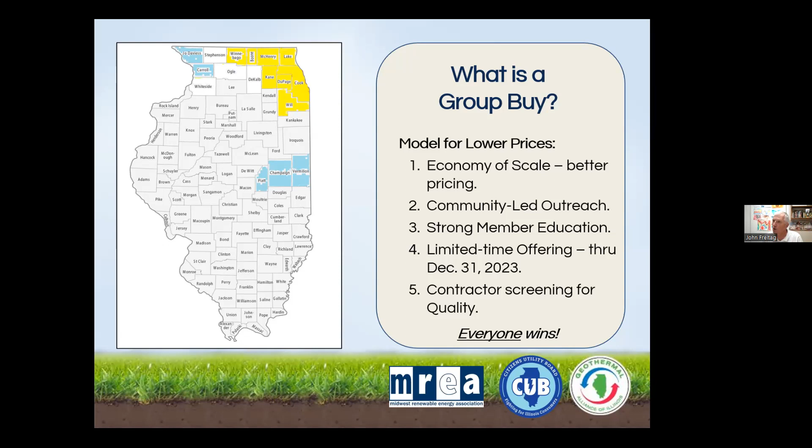Those are the first three geothermal group buy programs that I know of, and the only ones that I know of on planet Earth. Hopefully this is a model that'll take off, but it got started in Illinois. So here's some details about the program.

We kicked off, give or take, about April 1st, early April. So this is a real new program. We've done about a half a dozen of these power hour sessions, both in person and virtually. The program runs to the end of the year. My hunch is that we're going to have pretty good success with it. Then there will be a year 2 for the program, but that's details for down the road.

So why do we want to think about geothermal heating and cooling, and why do we want to promote the technology? Well, it's the most efficient technology known to mankind today. Don't take my word for that—that comes from the US EPA. You'll see as we go through this presentation that it's not only the most efficient heating and cooling technology available today by far, it's also the most environmentally friendly and most comfortable heating and cooling technology you can have for your home or business.

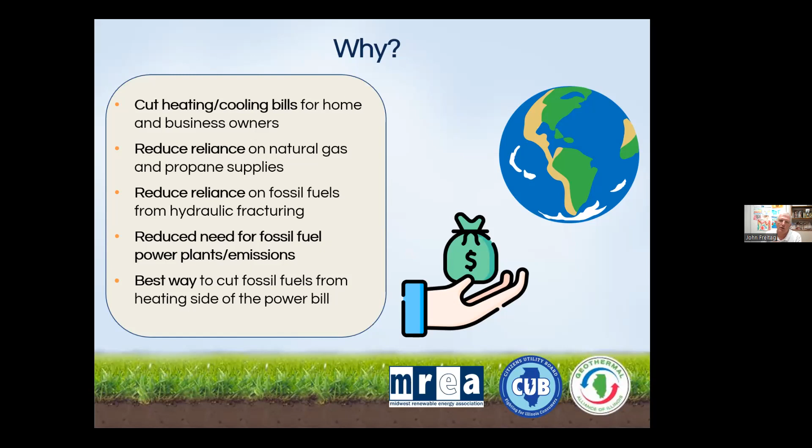Like we said at the beginning, I've had it in my own home for 24 years now, and my wife will tell you that it is the most comfortable heating and cooling technology she's ever been around.

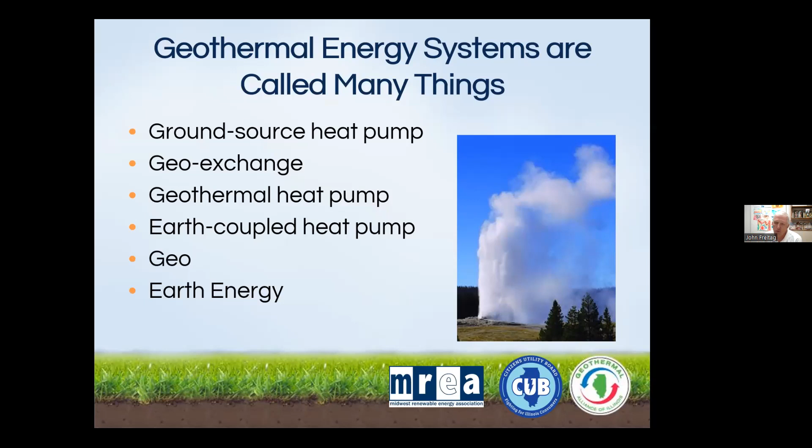We know if you go around the country, geothermal's called many different things. Out east in the New England area, they tend to use the term ground source heat pump. That's fine, it's all the same stuff. We just refer to it as geothermal in Illinois because that's what people know it by. And no, it's not Old Faithful—you don't need Old Faithful. It's not high temperature geothermal, it's moderate temperature geothermal, typically accessing the Earth's free energy through a system of piping in the ground.

Geothermal heat pump technology produces on-site renewable energy. Don't take that from me, take that from the federal government, the US EPA and the Department of Energy—they refer to geothermal as renewable energy. Some people would say, how can geothermal, which uses electricity, be renewable energy? Well, it's renewable energy because we're using the Earth's free energy; we're just using electricity to move that energy. If you remember anything from tonight's presentation, just remember that geothermal, while somewhat complicated compared to conventional stuff, really does simply two things: pumps water and blows air to take advantage of the Earth's free energy.

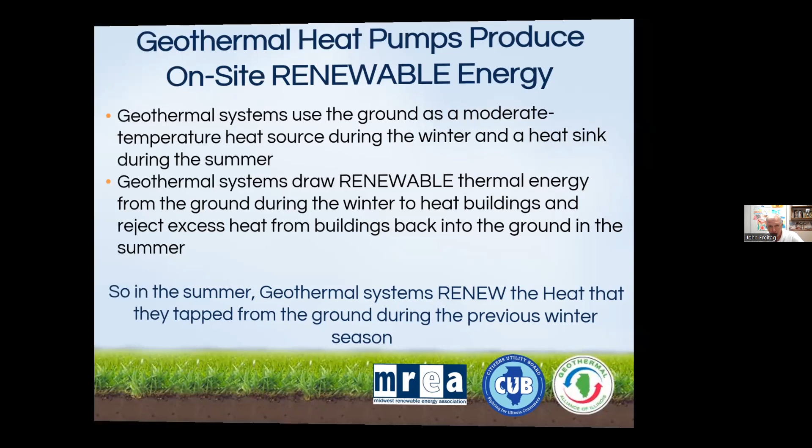So how do we do that? Well, I'm looking out the window right now and it's pretty dark outside, so we must be having some lightning going on. You've probably heard we've had a lot of electric utility issues in Springfield the past week—we still have about 5% of folks down here that are out of power. We had a big windstorm last Thursday, and they're still recovering from that.

But we know that the Earth's a vast solar collector. I can tell you that probably most of the day my solar array was chugging along at 100% for probably 5 hours today, and even at this time of night it's producing something. Even on the darkest, dreariest days of November and December, those gray, short days, my solar array still makes some energy—not as much as on a day like today, but it makes some. The Earth is a vast solar collector, and every day of the year, 365 days a year, it's collecting that solar energy, and we're taking advantage of that with geothermal heat pumps.

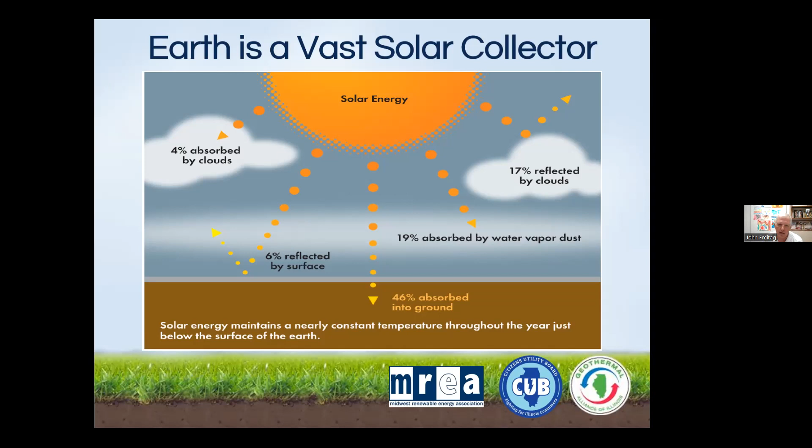This is an important slide because it shows why we are absolutely in the sweet spot for geothermal.

My incoming water temperatures with my geothermal system are right in the 53 to 54 degree range on a pretty much year-round basis. Why is that important, or significant, and why is it a good thing? Why are we in the sweet spot?

We know that in central Illinois, and you folks in northern Illinois are probably in the low 50s, 50 degree range for your earth temperatures. And why is that a good thing?

It's good for taking advantage of geothermal because we're heating and cooling in our part of the country. We're probably 60-65% heating, 35-40% cooling, give or take, and we go back and forth. In the summer we toggle into cooling, which is important on a day like today, pretty warm here in central Illinois. Then we can take advantage of the earth for heating in the winter. So we've got this nice source of a constant heat sink in the low to mid 50 temperature range that we can take advantage of in our part of the country.

Consider if you were in southern Texas or southern Florida, the earth is a lot warmer there, maybe as close as 15 to 20 degrees warmer. What are we trying to do in that part of the country? We're trying to reject heat into the ground, and the earth is already way warmer. So that's a much less efficient exchange of energy. It's tougher to reject heat into the ground when the ground is already much warmer.

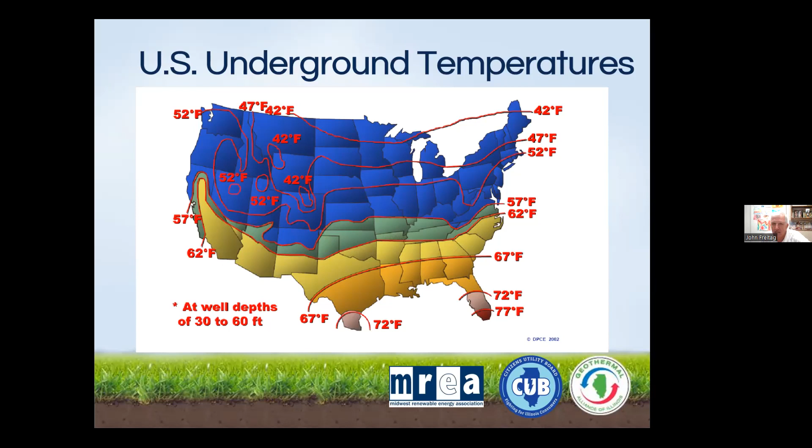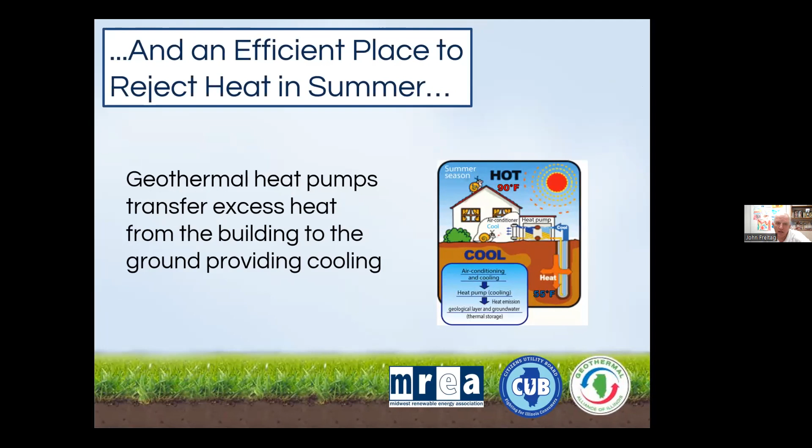We're in the absolute sweet spot in the middle of the country of the US for taking advantage of geothermal technology. So we know that the earth is a source of heating in the winter, and it's a place that we can reject heat in the summer. That's what cooling really is, it's a rejection of heat. We do this with geothermal technology, typically through a series of sealed underground pipes that look just like this. This is an exact piece of piping with fluids circulating through it, naturally warmed or cooled by the earth depending on whether we're in heating season or cooling season.

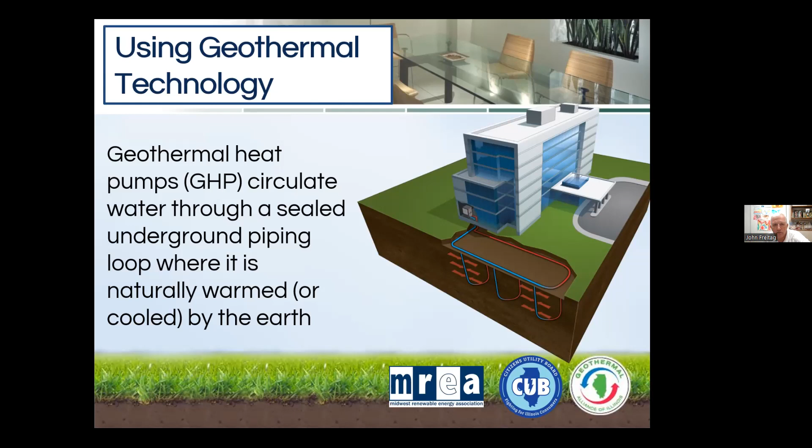Here's an important slide. My friend Dave Buss, who's monitoring the chat tonight, likes to say: if I asked you to give me $1 and then told you I'd give you $5 back in return, would you do that? Of course everybody would. That's really what geothermal does. For every $1 of energy you buy from the electric utility, for most of us ComEd, you get $5, maybe $6 worth of energy back. Why do you get that? Because we're using the earth's free energy, we're just paying for a little bit of electricity to move it.

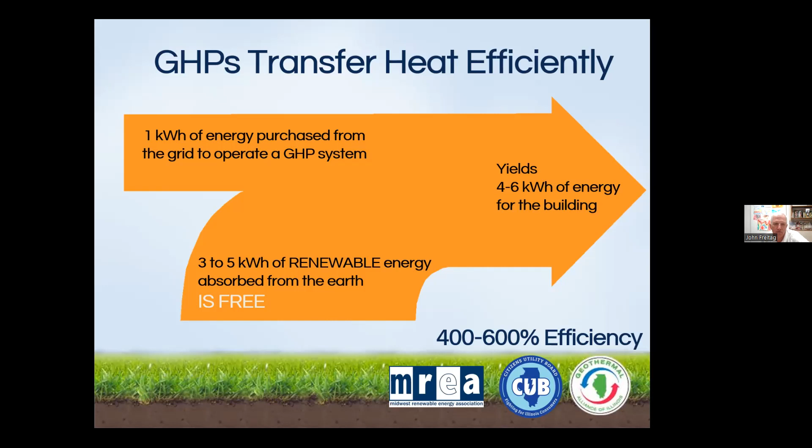Now, a lot of people, probably some even in this meeting tonight, think this is really new technology. But Dave put his first system in the early 80s. I've had geothermal in my own home since 1999. I went to work for the electric co-ops in a building that was heated and cooled with geothermal in 1985. So the technology's been around a long time.

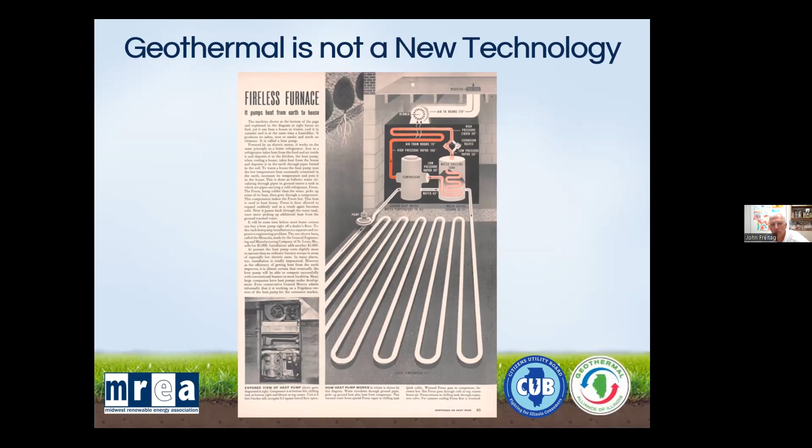Some of you would even remember Life magazine. This issue from the fall of 1948 had an article on the fireless furnace. For all intents and purposes, this was the first geothermal, these were the first geothermal systems. Kind of crude compared to today, very crude. They made a lot of mistakes and learned what worked and didn't work. But over the years, the technology has gotten much more efficient to the point where we're at today with 400 to 600% efficiency for the top of the line geothermal systems. Just incredible technology and incredible efficiency.

So everybody's heard of a heat pump. Probably not all of you have heard of geothermal heat pumps, but you've all heard of heat pumps. And if you've heard of heat pumps, you've probably heard of an air source heat pump.

So what's an air source heat pump and how does it compare to a geothermal heat pump? Well, both of them basically move energy from one location to the other, much like a refrigerator. If you pull your refrigerator out and put your hand at the bottom of the back of it while it's running, what do you feel? You feel heat. The refrigerator is rejecting heat into your conditioned space. Geothermal and air source heat pumps work much the same way.

An air source heat pump sits on a pad outside and it heats in the winter, trying to take heat out of the outside air. Even if it's 5 degrees, it's working hard, but it can still get some heat out of that air, believe it or not—it just has to work incredibly hard to do it. Geothermal is much more efficient, doing the same thing, but it takes heat out of the ground. Remember, there's no season underground; it's always the same year-round, probably 50 to 52 degrees in Northern Illinois. So geothermal is a much more efficient exchange, and that's why it's by far the most efficient heating and cooling technology available today.

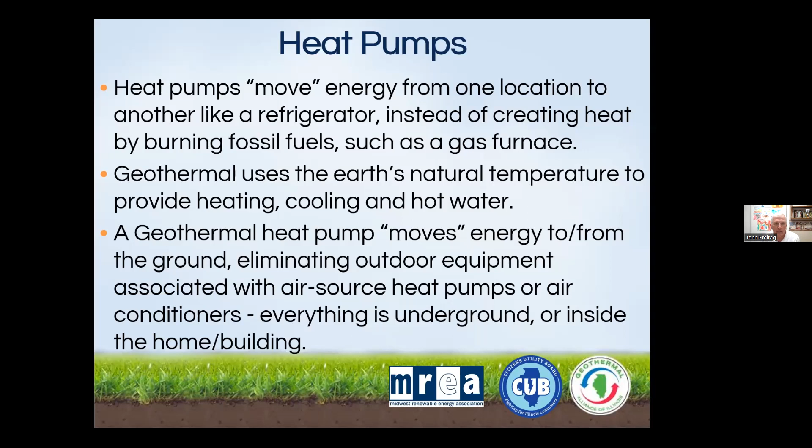So the next two slides describe the 4 circuits of every geothermal system. They're all important, and it's important to know that they all have to work and collaborate together, but they're all completely separate from one another.

There are 4 circuits. The first is the distribution circuit—in most of our homes, this is ductwork, which circulates cool air in the summer and warm air in the winter to heat and cool your home. In some homes, this might be piping for a radiant heat system, but for most of us, it's ductwork.

The second circuit is the refrigeration circuit, inside the actual geothermal unit that sits in your utility space, crawl space, or basement—wherever you have your heating and cooling system. You'll see pictures of my geothermal system in a few moments; it looks much like a furnace, only it has some piping connected to it.

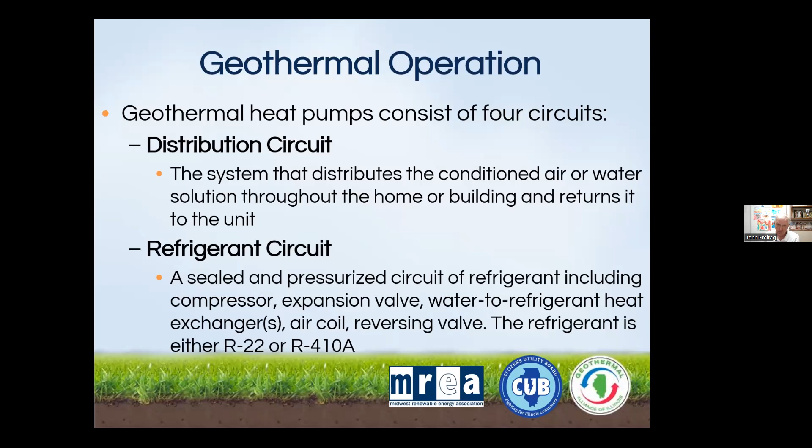The third is the ground loop circuit—basically piping buried in the ground. I'll tell you about mine in a moment. My loop field is 175 feet deep, in my front yard right behind where I'm sitting, with probably the first loop about 15 feet from where I sit.

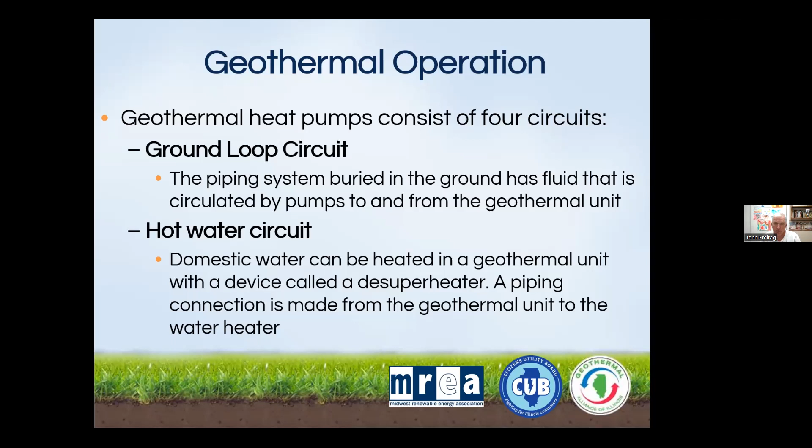The fourth circuit is the hot water circuit. It's not on every geo system, but it's on most residential systems. Why is it important? Because it provides free or subsidized hot water. And why is that important? Heating domestic hot water in most homes is the second largest user of energy, right behind heating and cooling, and in some homes it can be as much as 20% of energy usage. It's a free byproduct of every geothermal system, or can be, so it's important to have the hot water circuit installed.

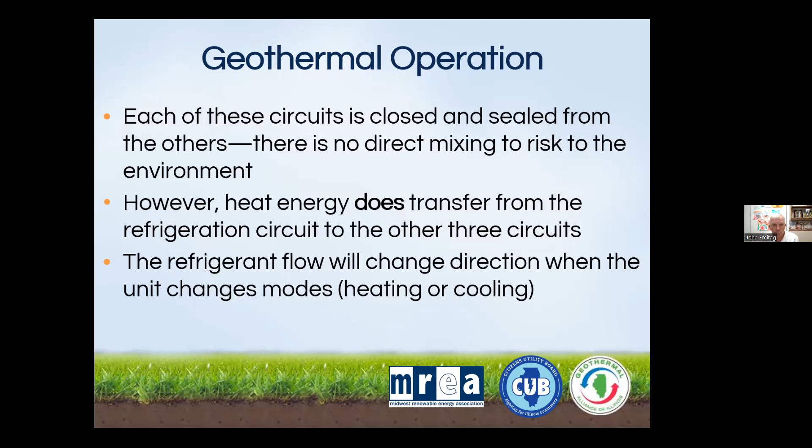Each of these circuits is closed and sealed from the others, but it's important that they all work together so energy transfers from one circuit to the other, while the fluids don't intermingle. The fluids in my loop field out in my front yard don't mix with the water that goes to my water heater, and neither of them mix with the refrigerant in my geo system. They're all completely separate and sealed, but it's important that they work together.

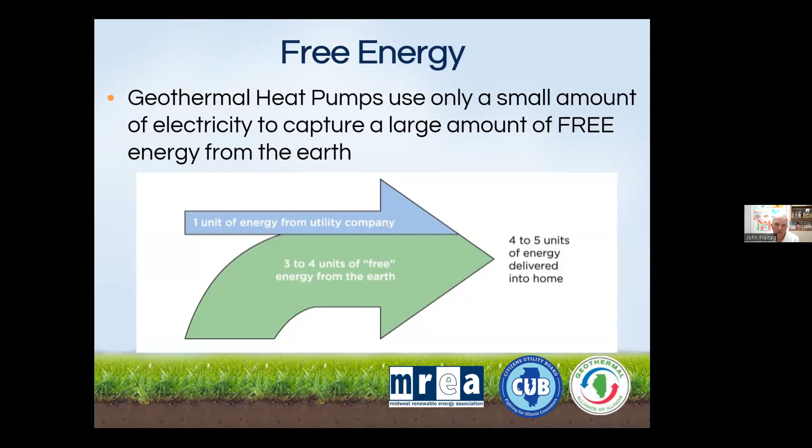This point is a little redundant, but it's important, so I like to repeat it: if you buy a kilowatt hour of energy from ComEd or whatever your electric utility is, you get the equivalent of 5 kilowatt hours of energy out of that, because most of it's free—we're just paying to move it.

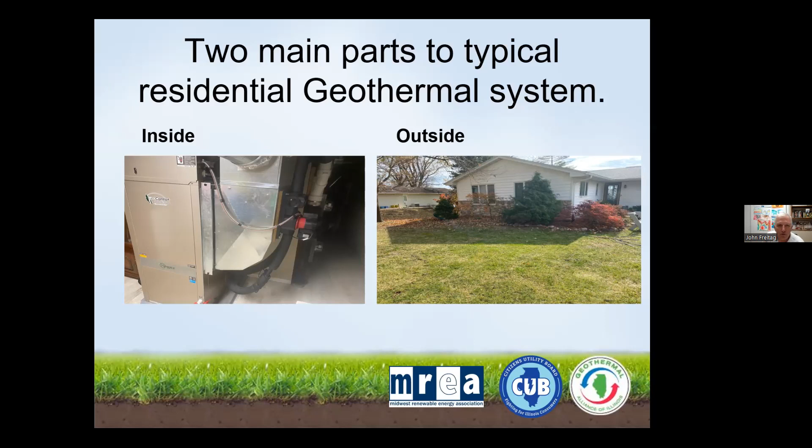So when we talk about efficiency, remember geothermal is the most efficient heating and cooling technology available today by far. We rate our equipment in two ways, one for cooling, one for heating. In cooling, we rate by energy efficiency ratio, or EER. Probably most of you haven't heard of that, but the higher the rating, the better.

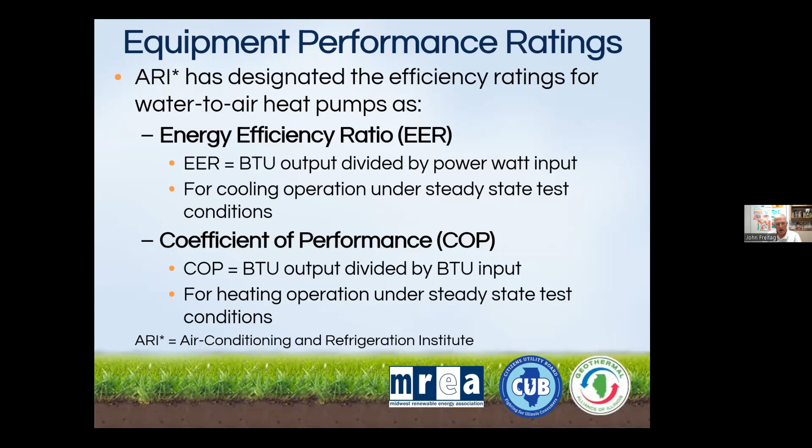You've probably heard of SEER, which stands for Seasonal Energy Efficiency Ratio. We don't use that with geothermal because geothermal knows no season. Underground, it's the same year-round, never changes. So we've got a much more efficient base on which to operate. In heating mode, we rate by coefficient of performance, or COP. Again, the higher the rating, the better, the more efficient.

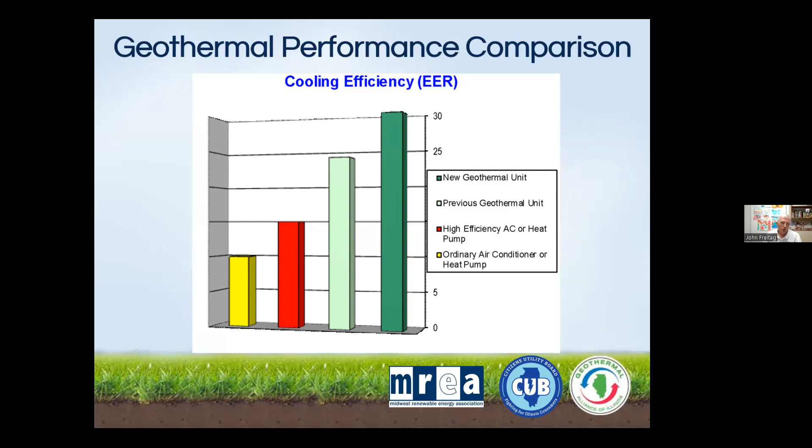So in cooling, we rate in EER, and you see the newer systems now are north of 30 EER, and that is really good. You see how it compares to an ordinary central air conditioner system, or a very basic old school air source heat pump, on the yellow bar. There's no comparison, at least 3 times the efficiency.

And in heating mode, this is where geothermal really shines, with COPs north of 5.0. You see how that compares on the other end of the spectrum to the old school 80% efficient gas furnace or gas boiler. It's absolutely no contest, you can't even really compare the two.

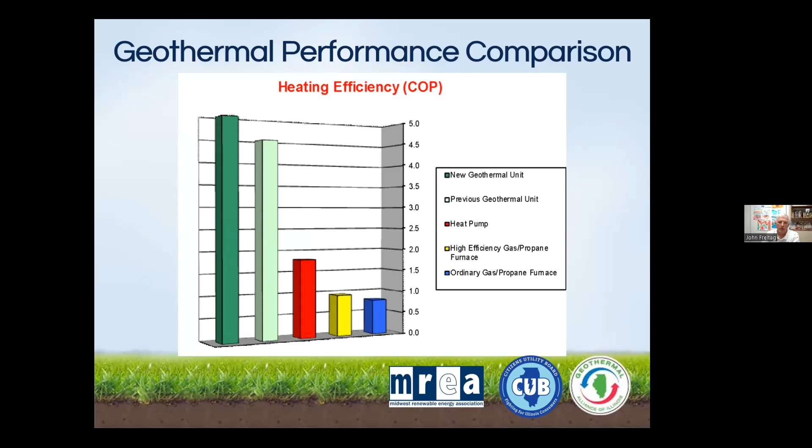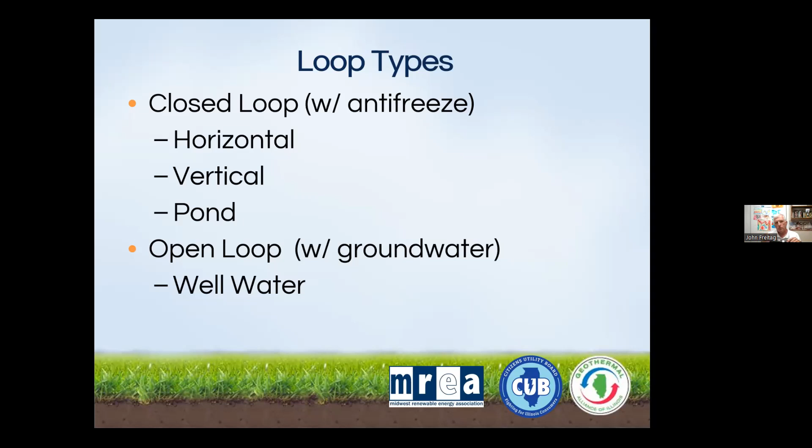So what's the heart of the geothermal system? It's the geothermal loop field. For most systems, we use a closed loop system. There are some open loop systems in Illinois, and I'll spend a little time on that, but not much, because they aren't all that common. Most have a closed loop system like mine. Remember, my loop field is three 175-footers, just like this, except the piping, instead of 18 inches from top to bottom, is 175 feet deep. That's connected to my geothermal system that's 10 feet from me, and it's a vertical geosystem.

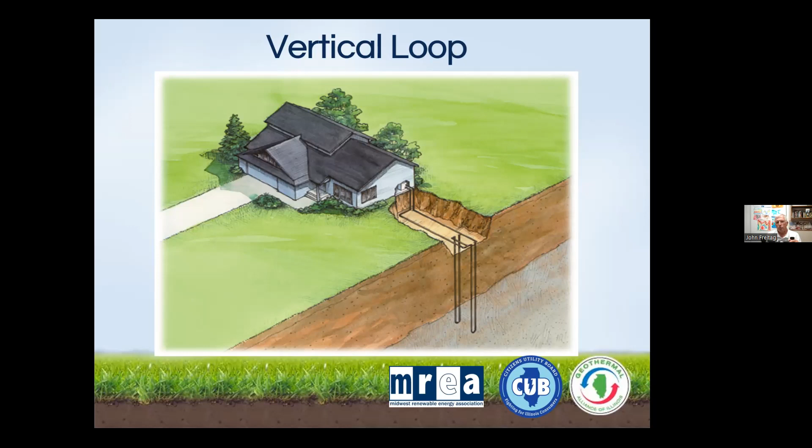I would say in Illinois, of all our geothermal systems installed in our state, probably 85+% are vertical loop field systems. Why is this? Well, for the most part, most of us don't have a big yard. Most of us have existing homes with finished yards, and it's just the easiest, best way to get a loop field into a rather compact space with the least amount of damage to our existing yards.

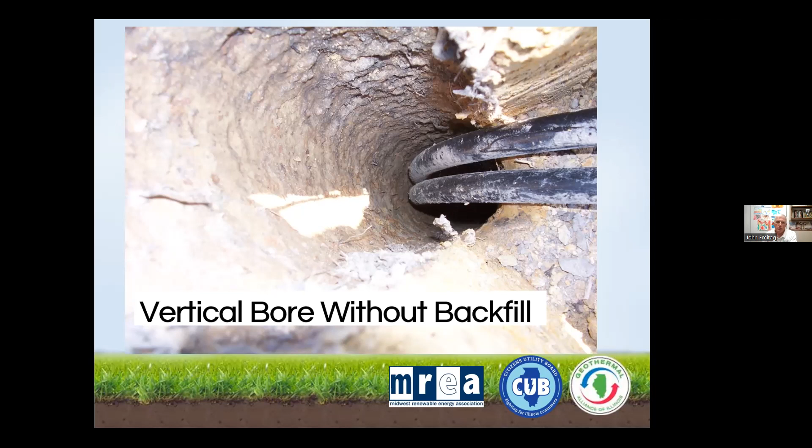So what does this look like? On installation day for the loop field, a drilling rig that looks much like a water well rig comes in, drills a 5-inch hole typically, drills to the prescribed depth, and inserts the piping into the hole. As soon as that's done, that hole is backfilled with bentonite grout.

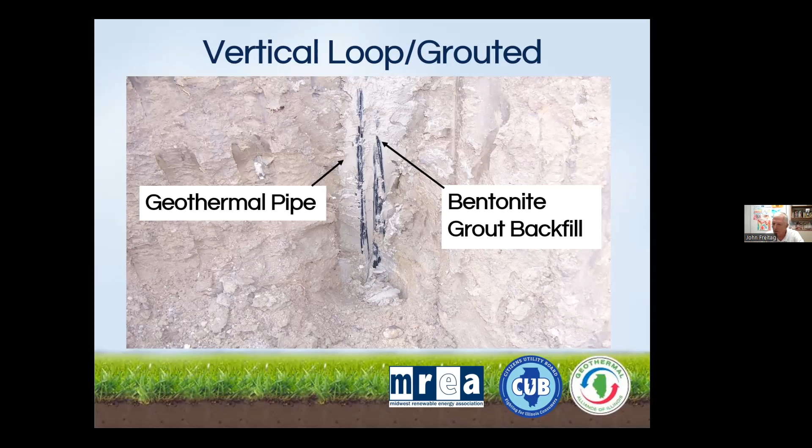Why is this important? It's important for two reasons. Number one, we want to seal that borehole because that's a potential path for contamination to our groundwater, and we don't want that. The bentonite grout seals it better than the earth did itself. Number two is the conductivity. What needs to happen underground? Well, we want to dissipate the heat in the earth, spreading it out in summertime when we're rejecting heat into the earth. In wintertime, we want to draw that heat into the fluid that circulates through this piping. Bentonite grout does that very, very well.

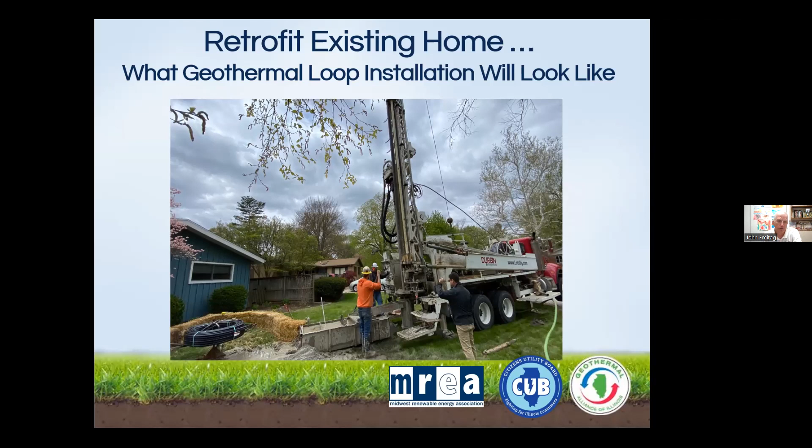It makes a little bit of a mess, but it heals up pretty quickly, and then you go on. Like I said, my system's been in for 25 years. It'll be in for another 100 years in Illinois, in Springfield, Illinois.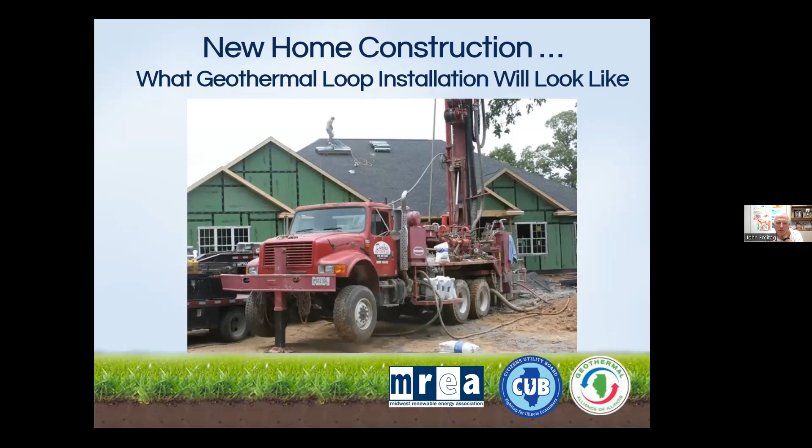This is what new construction might look like. This was a picture taken in Springfield, actually of a guy I used to work with before I retired. You see, they were building the house, still putting the roof on when they were putting the loop field in the front yard. And of course, they didn't have nothing really to tear up there because nothing was finished yet.

This is how many people it takes to put in geothermal. That's as bad as the jokes are going to get tonight. In fact, it's the only joke you're going to hear. We used to train heating cooling contractors in loop field installation, and we do these field days, and that's why these guys are all standing around with their hands in their pockets, just observing that part of the job that they usually don't do, but it's good for them to understand. So that's what that was.

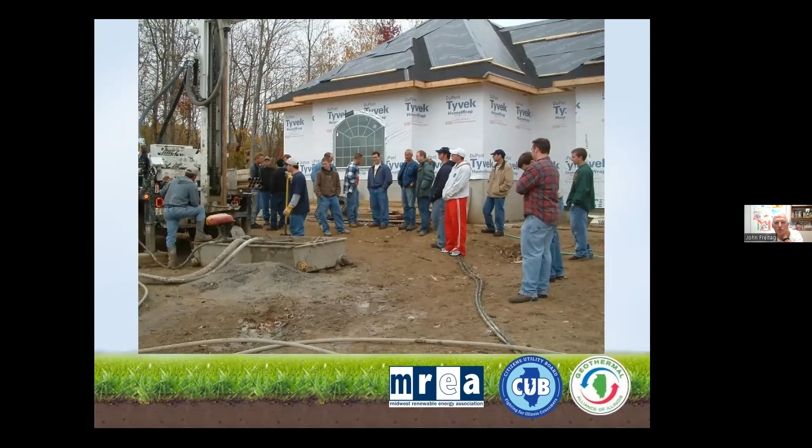Another way to put in a loop field is with horizontally bored loop field. This is increasing in popularity in some areas, and it offers some advantages and also some disadvantages compared to the typical vertical loop field installation, which is still the most popular. The nice thing about using directional boring technology is that you can put the loop field in diagonally, horizontally, go around in a circle if you have to, move around trees and such, and it does a little bit less damage to the yard.

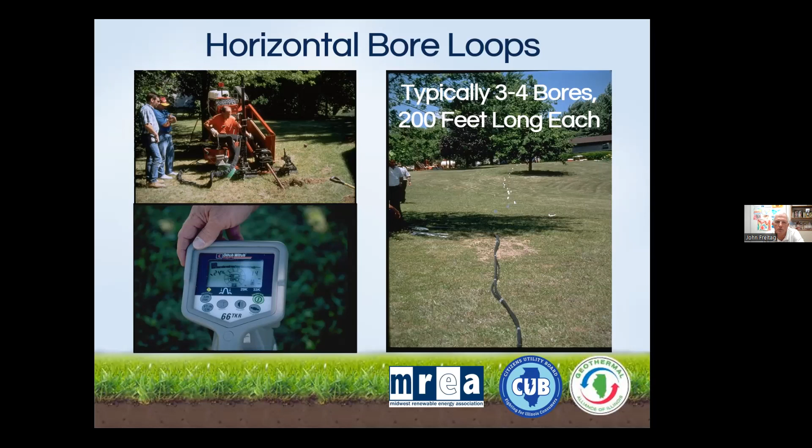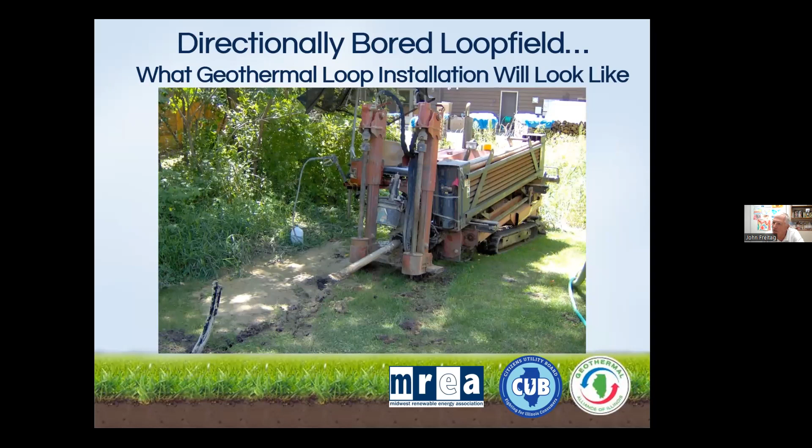Everybody has seen this type of equipment along roadsides, putting in fiber optics, water lines, and sewer lines. But you can use it for putting in geothermal loop fields too. So this is what it might look like. You can see it's probably lunchtime here. They've put in the first loop down in the lower left-hand corner, and when they come back, they're going to start on the second one. Eventually they're going to tie into the house in the background, and that's going to look something like this.

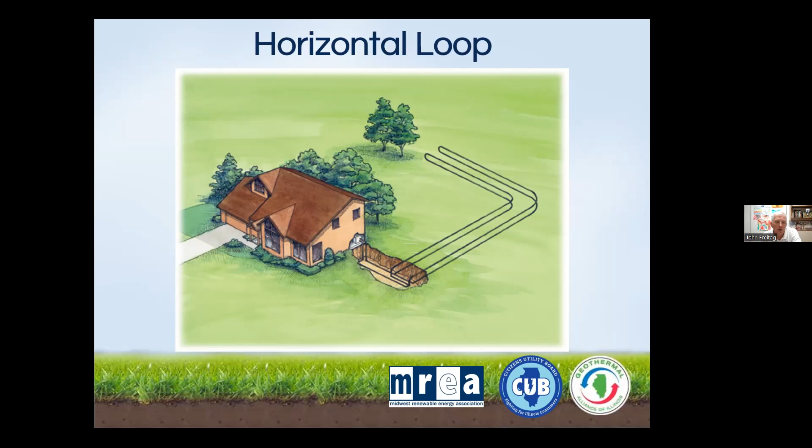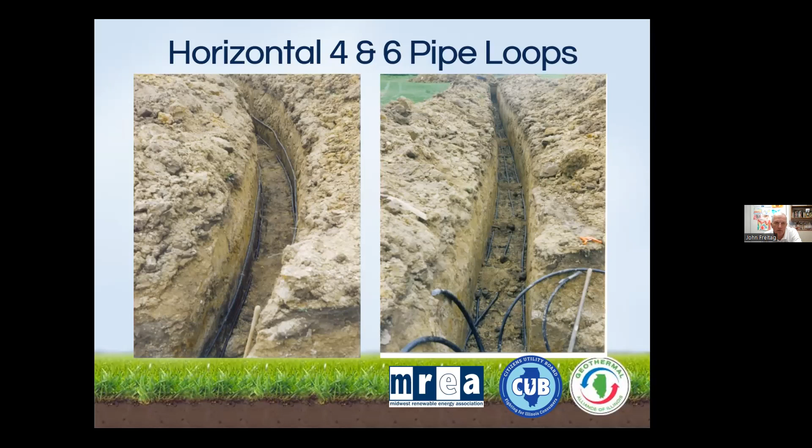Then there's the horizontal loop field, pretty much the same idea as the vertical loop field, remember mine in my front yard, except these loops are installed horizontally like this, typically at a depth of 6 to 7 feet. So why would somebody do this? Well, if you live out in a rural area and you've got maybe a 5-acre lot and you're building a new home, nothing's finished yet, this is a perfect way to install the loop field, save a little bit of money because it costs a little less, and you don't really care if you have to come in and trench or use a track hoe to dig your loop pit for the piping, because nothing's finished yet. So it provides another alternative.

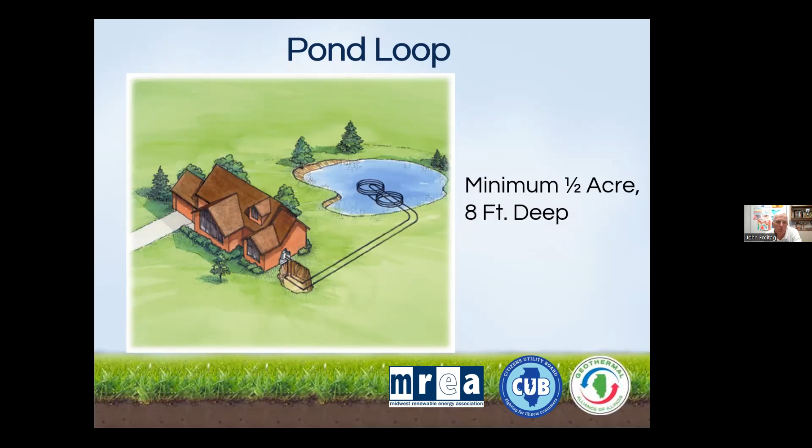Another alternative yet for those people who might be fortunate enough to have a big enough piece of property is a pond loop. If the pond is big enough, has the carrying capacity even through the worst drought, to carry a pond loop geothermal loop field, that technology can work very nicely as well. The loop is basically floated out, dropped into the bottom of the pond, and it works perfectly well.

Some of you have probably heard somebody say over time, oh, geothermal is for people who build new homes, or it doesn't really work in older homes, or geothermal doesn't work in churches or schools, or this or that or the other. Well, that is usually said by engineers who don't really design geothermal, or heating cooling contractors who don't do geothermal. I can tell you, I've been around it a long time, and Dave Buss would tell you the same thing, that you can make geothermal work in virtually any application, but it's like everything else—some are easier and more obvious applications than others. Sometimes it is just so difficult, and difficulties often make for more expensive installations. Sometimes it just doesn't make the most sense and maybe isn't even the best option, but it can work in virtually any application, and it is a great option for most people.

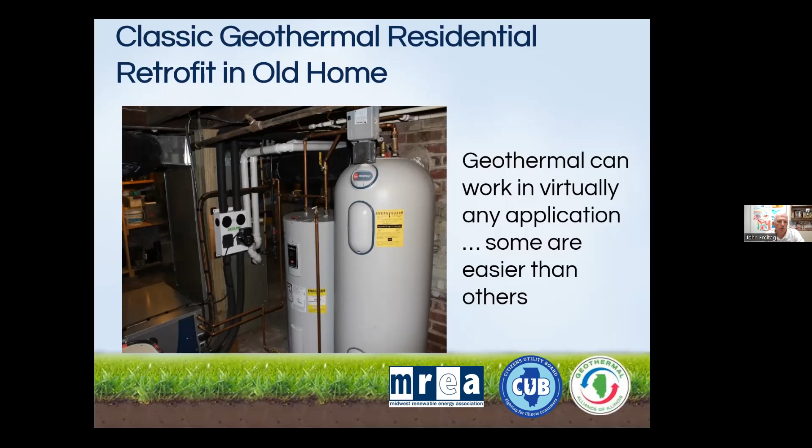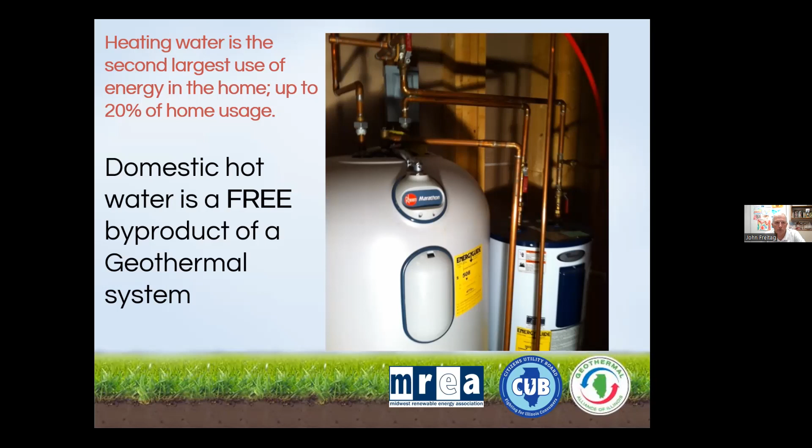Why is that? Remember, cooling is nothing but rejecting heat. So instead of rejecting it to the ground, we're rejecting it to the buffer tank to make free hot water. Geo also makes some hot water in the winter months. It's important because, especially in a home with high water usage - maybe a big family, lots of kids, lots of laundry, lots of dishes to wash - it's a big energy user. It's a great way to take advantage of absolutely free energy.

There are a few things we have to do differently with geothermal compared to conventional heating and cooling equipment. The very first step with every geothermal installation is to start with a load calculation. What is a load calculation? It's really nothing but going through the home or the facility we want to condition - could be a business, an office building, any type of facility, but for most of us, it's a home - and determining the exact heating and cooling needs. You do that by running a load calculation. It's not guesswork, we want to be exact.

Why is this important compared to conventional? Well, just about every home I've ever been in with a gas furnace has an oversized gas furnace. It's just the way it is. Doesn't cost that much more to put in that way, and it's the safe way to do it. Geothermal doesn't work that way. It can't be oversized or undersized, because with either one it just will not work properly. We want it to be right sized. Plus, this is expensive technology to put in, so we want to put in the absolute right system. So this is the first step, running a load calculation.

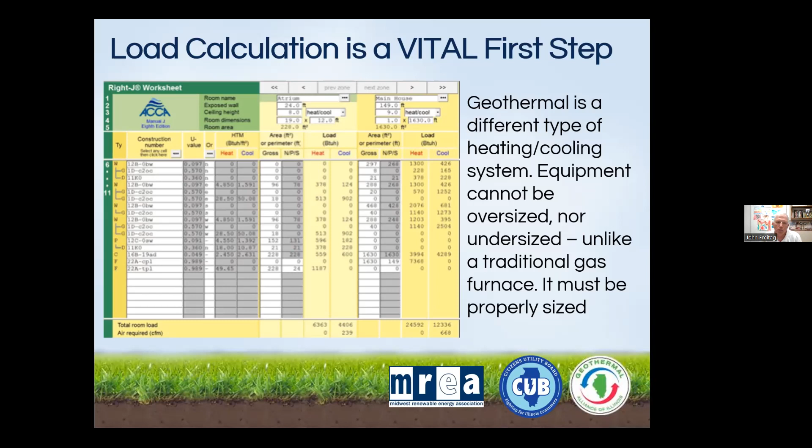Then we take the information from that load calculation and we design the system. How do we do that? We design it using the energy analysis, and every manufacturer has its own software for designing the system. It gives you all kinds of great information on what the system is going to do, how it's going to operate, what the temperatures are going to be. It tells you what the savings and energy usage are going to be, how it's going to compare to conventional over the course of a year. These energy analysis printouts are extremely accurate. So every good geo project should have these two things up front: a load calculation, and then an energy analysis that follows right behind it.

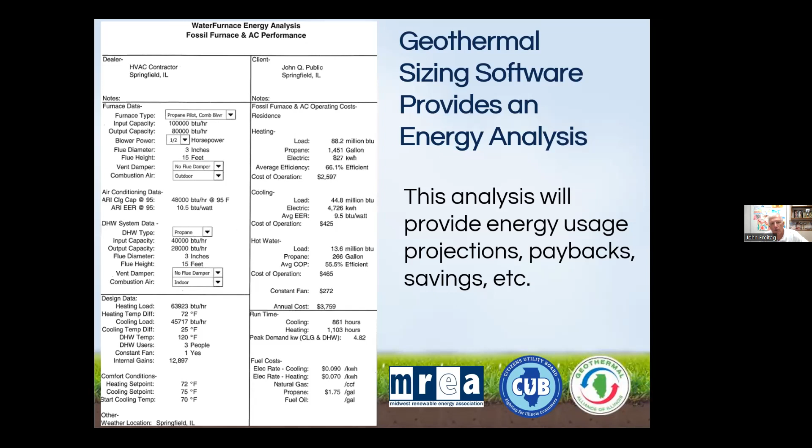So we want to share a little bit about geothermal costs and incentives, because as you've probably heard, this is expensive technology to put in your home or business, and it just is. It's expensive to put in, but it saves lots of energy over time, and it saves our earth over time. That's why we've started this group buy. One of the centerpieces of the group buy is that, depending on whether we meet our program goals, there will be a volume discount or rebate that comes back to all program participants.

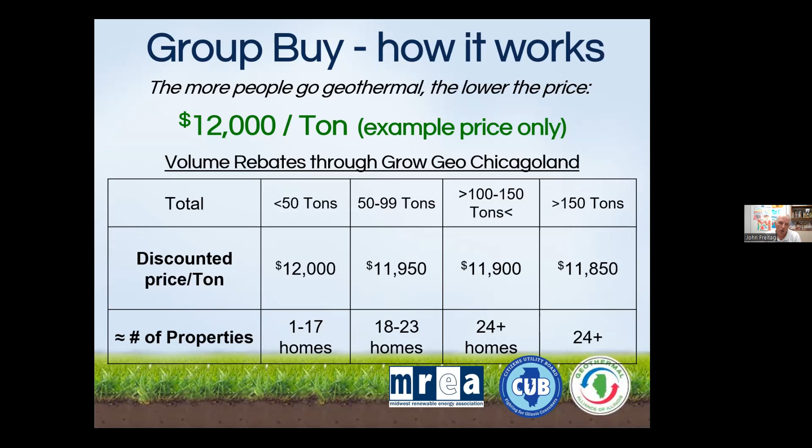So let's say you install a system this fall. Come next January, you will get a rebate from your installing contractor in the program. What will that rebate look like? My hunch is it'll be about $150 a ton. For most typical average houses, that would be a $600 rebate coming back to you, probably a month or so after Christmas. That's our goal - that's the beauty of the program. Now, it's important to say that every home is different, so we can't say geothermal will cost this much. Our goal tonight is to give you an idea about that, but really every home is completely different.

All the needs are different. Some homes won't need a new water heater, some will. Some will need a new electrical panel, some won't. It's literally all over the place. So it's really hard to say how much it costs because every project is different.

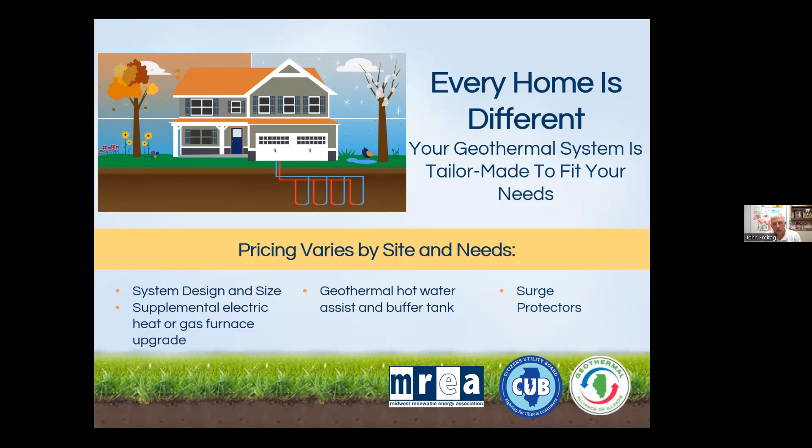But fortunately, we've got some really good incentives that exist. At the end of the day, with the incentives available to us, just know that between 40 and 50% of the total installation costs can be met by ComEd and tax credits available from Illinois and the federal government.

So the best incentive we currently have is the federal renewable energy tax credit, or 30% tax credit. This is available for the next 10 years. It's the same exact tax credit that's available for putting in a solar array, and everybody is eligible for it. Of course, you have to have an appetite—you have to pay some taxes—but it can be spread out over a number of years. And it's a tax credit, not a tax deduction.

In addition, there's a $2,000 home efficiency tax credit that's available. You can find information on all these incentives at irs.gov or energystar.gov.

In addition, ComEd has some really, really good incentives. ComEd currently has a $1,500 per ton incentive for residential geothermal. So a typical home, my house for instance, is 2,950 square feet with a 4-ton geothermal system—that's your typical type house. With that system, you would qualify for a $6,000 rebate from ComEd if you use a ComEd approved contractor in the program. All of the contractors in this program are also in ComEd's program, and there are others in ComEd's program as well. But that's a really great incentive.

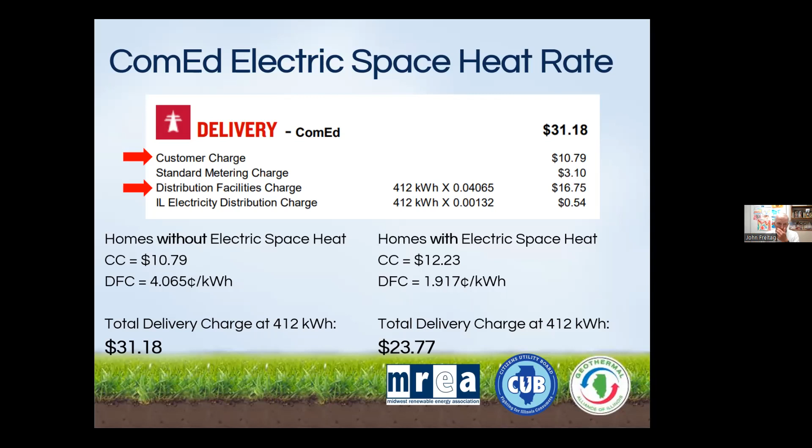Then there are other incentives you wouldn't even think about. On ComEd's delivery charge—this is on your entire delivery fee for ComEd, the wires charge if you would—if you go to an all-electric home with geothermal, you reduce the delivery charge on a monthly basis. This is forever, by about 25 to 30%. It's a small amount of money every month, but it's just an example of how geothermal can pay for itself over time with the incentives available.

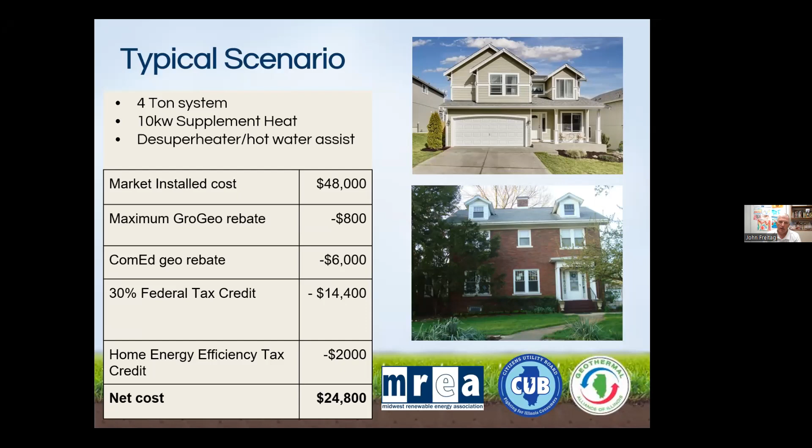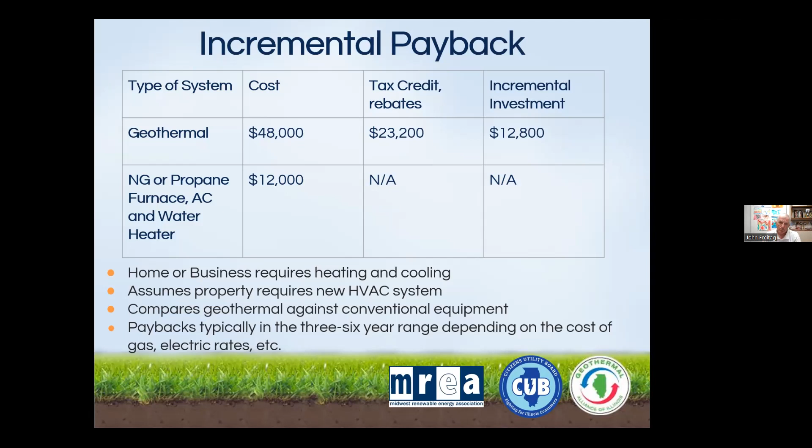So at the end of the day, how might that compare to a conventional system? Let's say you were putting in an absolute cookie-cutter gas furnace and code-based central air conditioner system—just guesswork—let's say that costs $12,000 to $14,000 to put in. Let's be conservative and say $12,000, which gives you an additional incremental investment after the tax credits and such of about $12,000. So if you're thinking about dollars only as the incentive for doing this, how do you pay that back? You pay it back over time by reducing your energy costs.

Remember, you're going to pay a higher electric bill because you're now heating with electricity. But for most of us, the end game has been to eliminate your gas bill. I eliminated mine—I still remember my last natural gas bill from December 1999, $338, which was a lot of money 24 years ago. But the efficiency of geothermal for all aspects—heating, cooling, making hot water, operating the fan—total costs are half or less. It's just the efficiency of geothermal. Remember, we're pumping water and blowing air; all we're doing is moving energy with this technology.

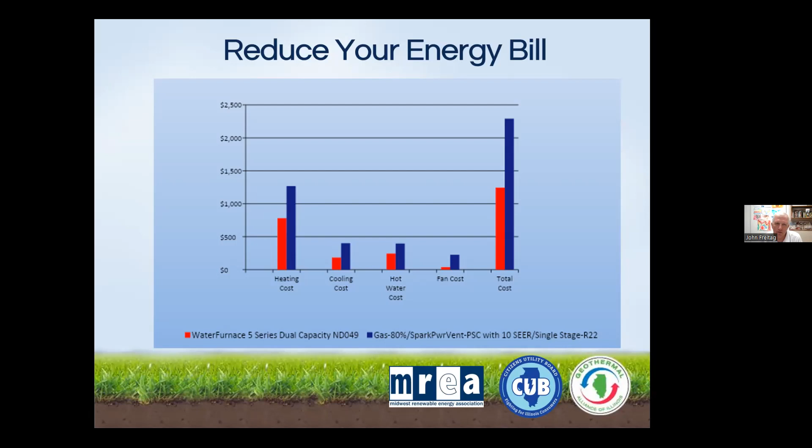So we're coming down the home stretch here. What does geothermal do to the value of your home? Well, I think it makes homes more valuable. I know it does in Springfield. I've had my own home appraised, and I know I qualify for every energy efficiency point on the checklist that an appraiser does. Would it actually make my house more valuable if I went to sell it?

Well, I think so, having solar and geothermal in my home for the person who wanted that. Is that going to become even more important in the future? I think so, because we're only going to become more cognizant of energy issues and energy costs as time goes on. I think that's common sense, and it should make our property more saleable, more valuable.

We've got another nice incentive with this program, and that's the financing option through the Clean Energy Credit Union. Some contractors also offer this, but it's available through this program. Anybody who installs geothermal through this program gets a free membership to MREA, which allows you to finance through the Clean Energy Credit Union. You'll find information online there as well.

As we get to the end here, we want to talk a little bit about health and environmental benefits. It was mentioned earlier that a couple of days ago, the Earth had its warmest day ever on record, we think. My wife, Joan, commented to me the other day as we were looking at the haze from the forest fires in Canada. She said, boy, we sure have made a mess of our Earth, haven't we? We just have to do something about the mess we've gotten ourselves into.

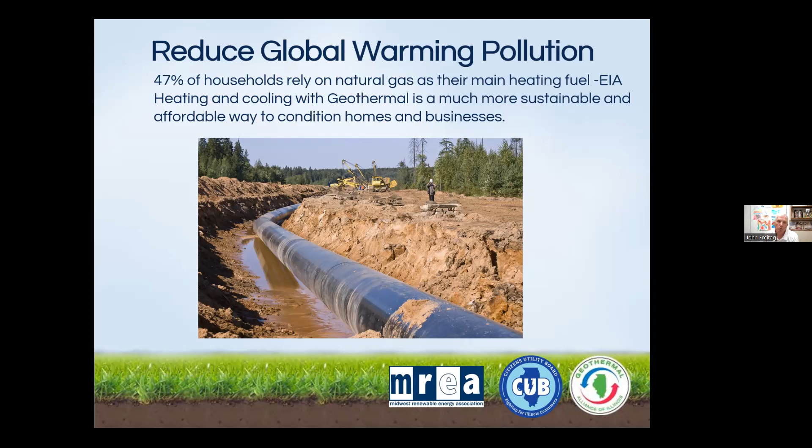Really the answer is geothermal. It's the most efficient way to go, along with solar. Combine the two together, and it's just a match made in heaven. It is absolutely the answer. Isn't it an expensive answer? Yes, it is. But if we want to do anything about climate change, this is the way to do it.

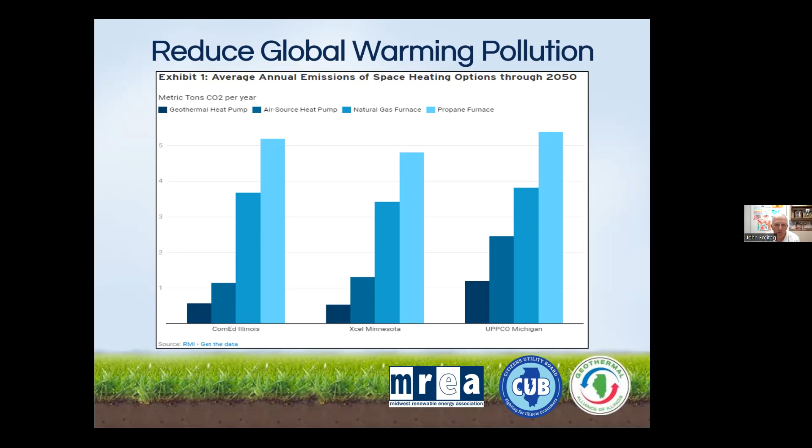This is an important slide. You'll see ComEd on the left side, showing the amount of global warming pollution in the ComEd system if we use geothermal — you'll see that in the lowest bar. Then you'll see what it looks like if we use a propane furnace, shown in light blue. There's no comparison here. The other two are different utilities in the Midwest, but you see ComEd on the left of the three there, and there's just absolutely no comparison.

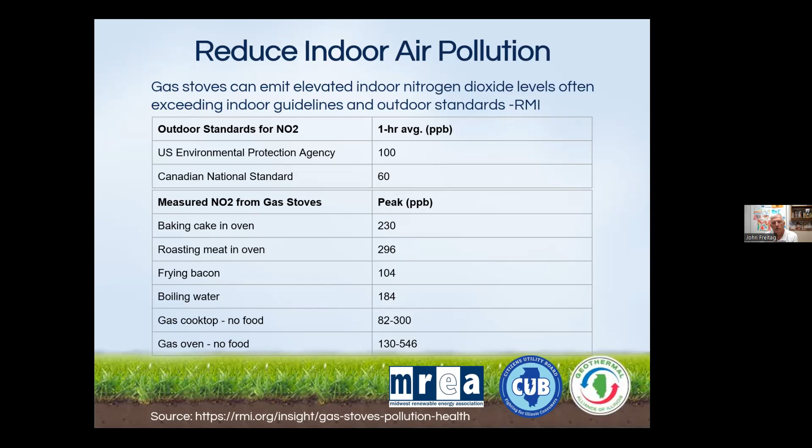This one is really important for me. I mentioned my two granddaughters — I have six grandchildren, and they're at my home a lot. When they come to my house, it's important for me that they're not breathing bad air in my home. So we don't have gas appliances in my home. I just don't want that, or the bad air quality caused especially for young kids that comes from gas water heaters, gas furnaces, gas cooktops, etc. I'm not a hater of people who use that technology — I just don't want it in my home. And we know that's especially important as homes get tighter and tighter.

So if you're interested in moving forward with geothermal, how do you go about it? I'm not going to go through all these steps, but I'll say you start the process by filling out the form, giving your name and email address in the chat. I think Jeff's probably got it in the chat. Unless you don't want it, you'll likely get an email from the program with a link to that. Fill that out, and then you'll see what the process is.

Usually the first step is a phone consultation. If you are a good candidate for a geothermal project and you're still interested, I can tell you that the contractors in the program take care of every step along the way. They arrange for the loop field to be installed, handle the permitting, walk you through the process, and at the very end, they teach you how to operate the system and do the QA walkthrough.

I will warn you: number one, geothermal projects can be costly, and we don't want to sugarcoat it. This is expensive technology. You're putting a loop field in the ground in your yard, and that adds cost to the project.

Number two, don't expect that you're going to snap your fingers and have a geothermal system in tomorrow. If your central air conditioning system fails in hot weather, you might find a heating and cooling contractor who can give you a new system quickly, but they aren't going to give you a geothermal system pretty quickly. It's just a serious time commitment.

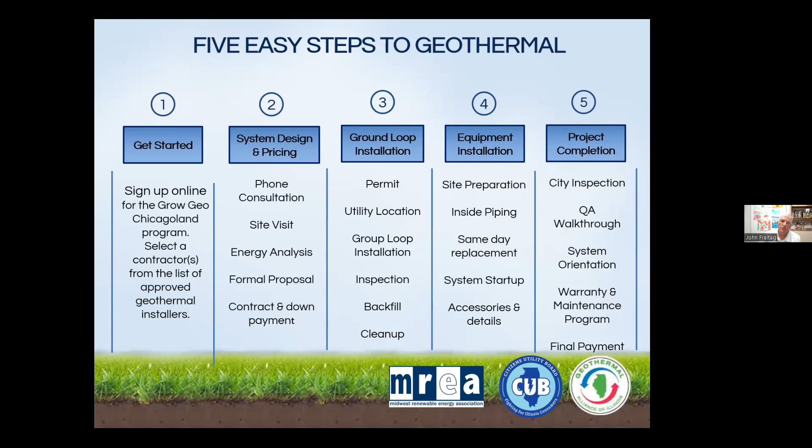For most of you, if you're interested in doing geothermal, get started as soon as possible. If you get started right now, you'll have your system in operation for heating season. But it can take two or three months from start to finish to pull the permits, order equipment, get the loop field installed, and get the system operational. It just can take that long, and I want to give you fair warning about that. That's just how it works.

So what are the next steps? Well, you fill out the site assessment form. That basically gets the ball rolling, and then we go from there.